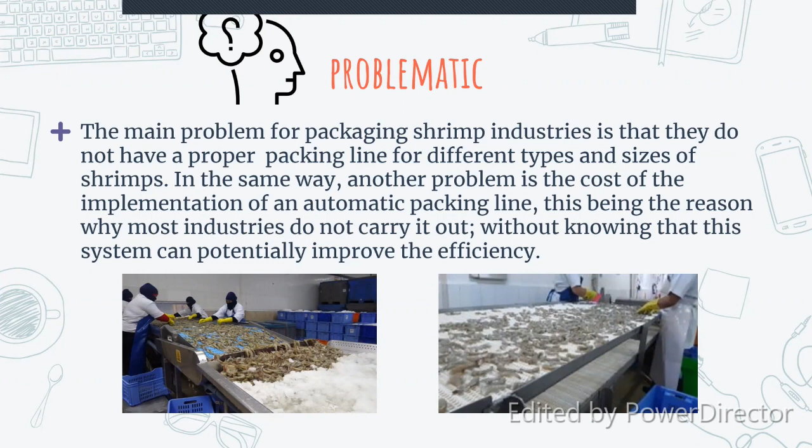Next, we are going to discuss the questions that are going to be solved in our project. These are: does implementing an automated packing line improve efficiency? How much will carrying out a packing line cost? Finally, what type of machines are going to be used in the system to make it flexible?

Up next, we're going to tell you the general objectives and specifics. Our general objective is to improve the efficiency of the shrimp packing line by at least 30%.

As our specific objectives, we have: design a fully automated packing line, define which machines can be used according to the company's investment budget, compare characteristics and results between the automated production line versus the existing one, make the system flexible so other products can be added without making big changes, and finally, define the profitability of implementing the automated production line.

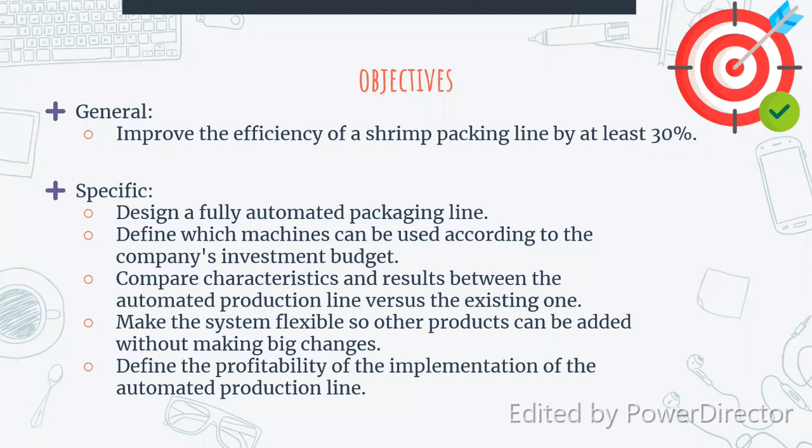Here we have a brief description of our project. The main purpose of this project is to establish an automated shrimp packaging line with different areas, such as a classification area, a storage area, and others.

The production line should be autonomous, meaning minimum human intervention should exist. On the other hand, it must be as efficient as a normal package line or even greater, but it also has to be flexible. Finally, our sponsor is Frigopesca, which does not have a completely autonomous packaging line.

Continuing with the solution, we consider the solution must be to establish an automated shrimp packaging line with a carton folding area, storage area, a weight sensing area, and a vacuum sealing area to ensure that the product is stored in optimal conditions. In the classification, shrimp are put on the conveyor that separates shrimp with enough space so shrimp can be recognized by a camera that classifies shrimp by their size.

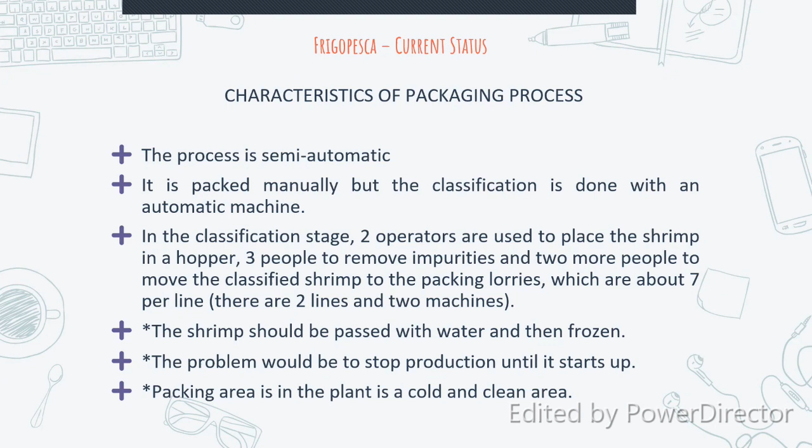In the classification stage, 2 operators are used to place shrimp in a hopper, 3 people to remove impurities, and 2 more people to move the classified shrimp to packaging lorries, which is about 7 operators per line, and they have 2 lines and 2 machines.

Another essential characteristic is that they are passed with water and then frozen. The problem with this current status is that when there's any obstruction in the machine, production stops until it starts up again. And the packaging area in the plant is a cold and clean area.

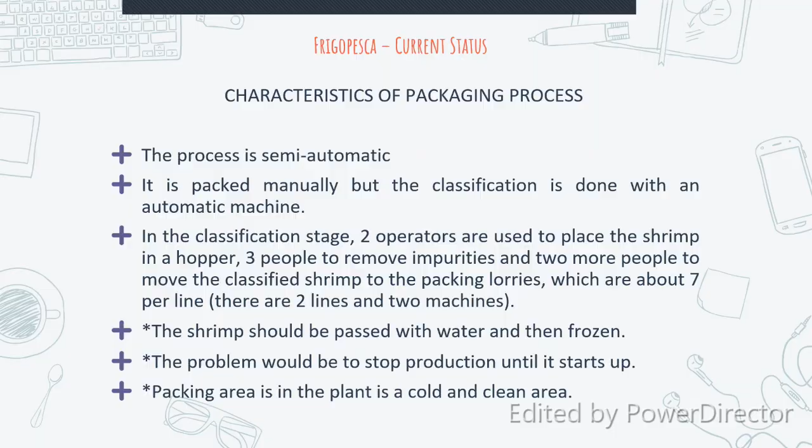Frigopesca also noticed some limitations in their production line. Personnel limitations are detected: sometimes there is a lack of communication between workstations, and there are some delays during the process. And in the shrimp deveining process, peeling and deveining, is a workstation that only operates depending on the customer request.

Another limitation is that this workstation is done entirely by hand.

This is the concept of the process solution. We divided the whole line into three stages: the automatic classification part, the peeling and deveining part, and the packaging stage. This is the flow diagram.

First, the shrimp come from the shrimp farm, and then it's stored in a big tub with cold water, where the cold chain starts. The water has to be controlled at a specific temperature for the shrimps to be in good condition. Then it is decided if it will be peeled or integral.

If it's peeled, it goes through the machine. If it's integral, it goes through a conveyor to the next stage, the size classifier.

And in this part, it's just peeled or just integral. These two are not going to be selected at the same time. This depends on the customer's petition, the customer characteristic of the machine that they want.

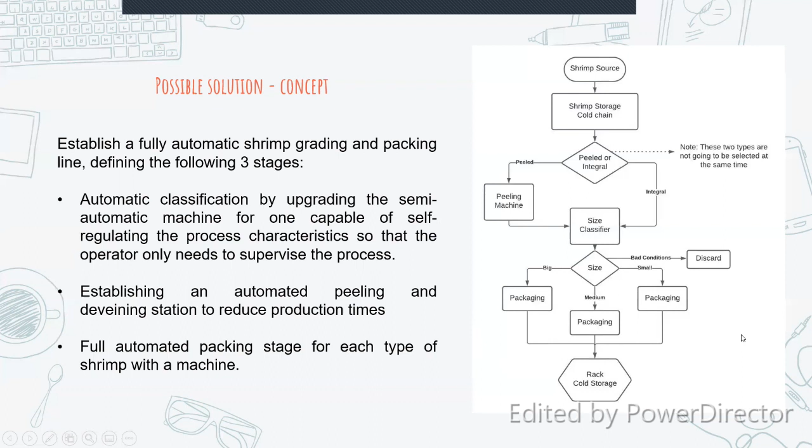Then it goes through another storage, another cold storage, to continue the cold chain, and it's there until it is then sent to the customer. Well, this is the solution for this.

I'm going to explain it here, but it's the FlexSim studio. First we have the source, and then the queue where the cold chain starts, the shrimp storage area.

Then this goes through this conveyor. It goes when it is entire, when it's integral, and when it's peeled, it goes through the peeling machine.

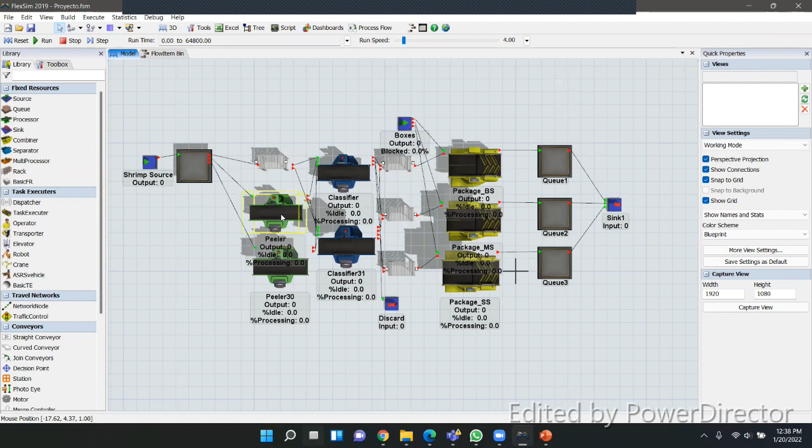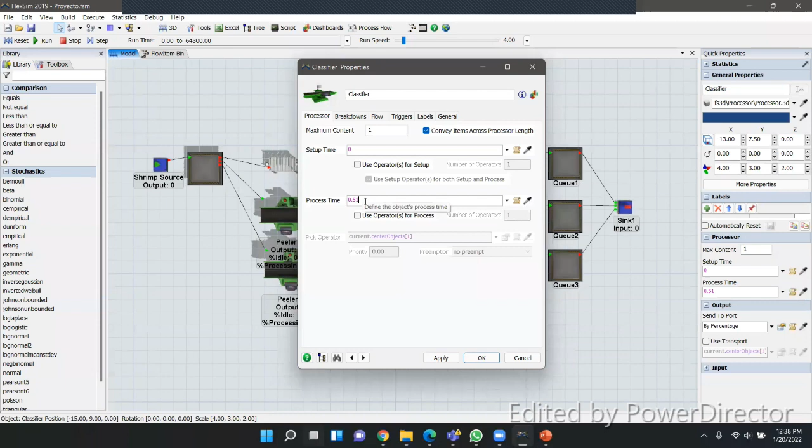For the peeling machines and classifiers, we decided to set this process time based on the literature. We checked a whole set of machines, classifiers and peelers, and took a minimum average of these process times.

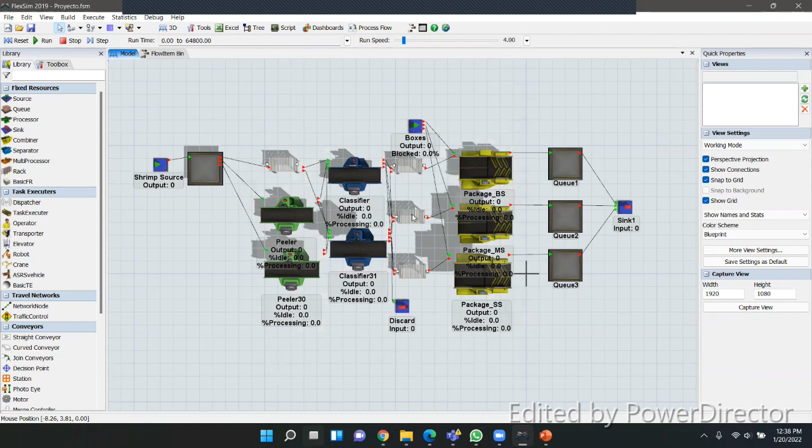The same with the packaging machine. Then we get that, so while we start the simulation, you can see the results go through the conveyor.

We decided to simulate it with this shape. This one represents a pound of shrimp.

This one is when it's classified, so we separated the colors: the non-classified by size and the classified by size, and then it goes to the package. It's a box.

Well, when we simulate, the whole time is 18 hours, because you work almost 24 hours with two shifts, the daily time and the night time. So we zoom in and account for the breakdowns, and we get 18 hours.

And this is the result: 51,000 pounds per day. The expected one was 45,000, so we reached the objective that we wanted.

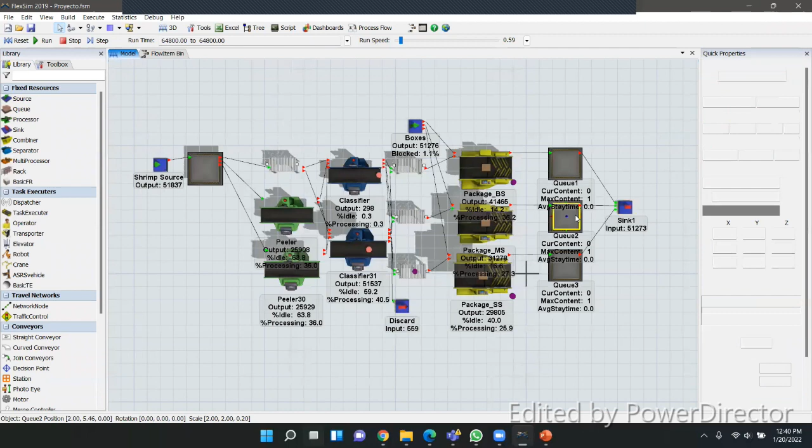We improved the output of the system, of the packaging line, the classification and packaging line, and this is the result individually by sizes: big, medium, and small.

Okay, as I said, there is just one form at a time for the shrimp to be classified, by integral or peeled.

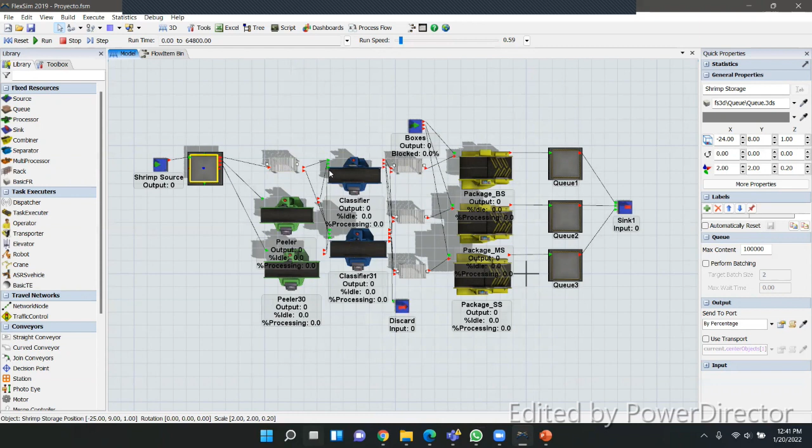So from the start, we decided when it will be integral or peeled. In this last simulation, it was peeled, so half and half for the two peeler machines. When we want it to be integral, we send 100% of the flow through the conveyor. The conveyor has no limitation because it is just a representation of the real conveyor, which is much bigger than that.

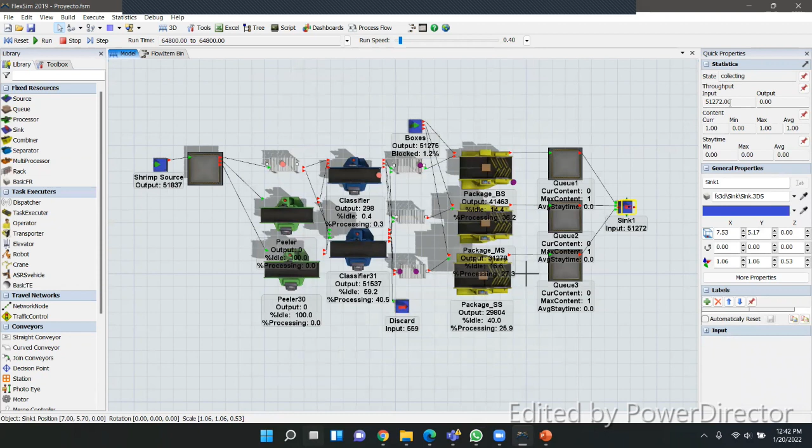And this is the result. So we can see we have a similar output because this machine has a very small process time per pound. They process several pounds per minute, so the pound-per-second time is pretty fast.

And then we get this output, which is the same, greater than the expected one, so we reached the objective of improving this output time.